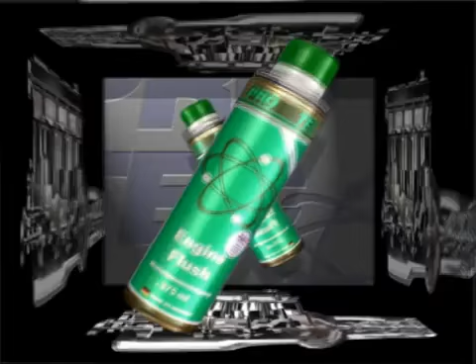Fuel, oil and lubricants, and their effects on combustion engines. Every time an engine is run, deposits are left behind, and these always have a long-term effect on the way the engine functions and its degree of efficiency. In particular, compression is reduced as a result of sediment in the area of the piston rings, oil rings, and their grooves.

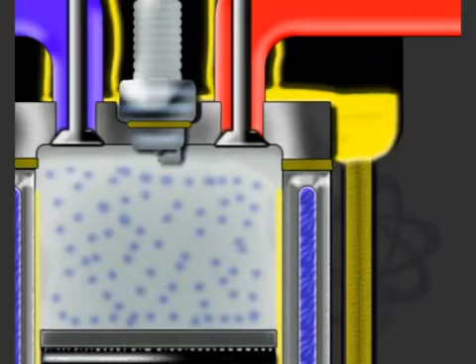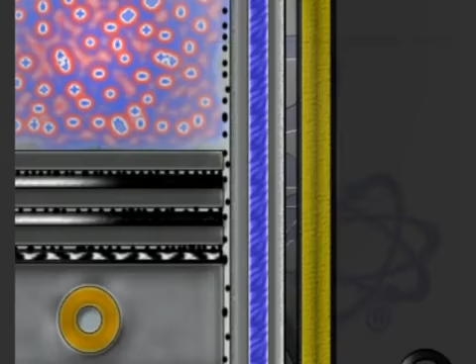The deterioration in the combustion of the fuel-air mixture resulting from this leads to a reduction in the engine's performance. As a result of this, there is an increase in both oil and fuel consumption. This creates a situation where the sediment caused by the combustion process increases markedly, exhaust fume levels rise, and not least, the wear and tear on engine parts escalates.

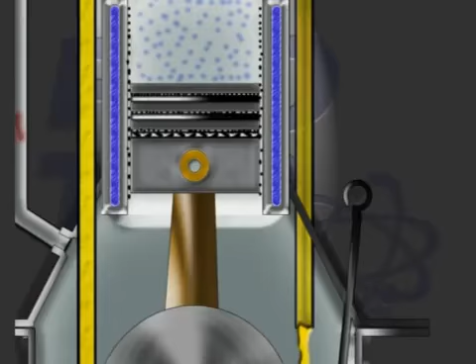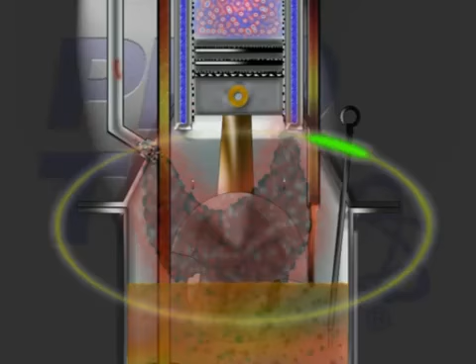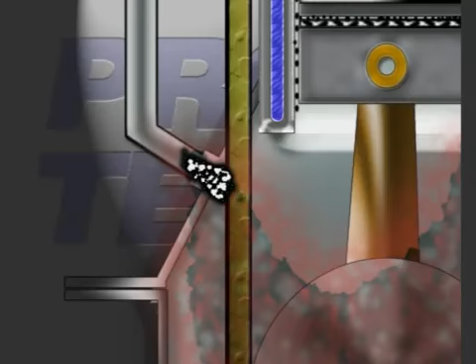Parts of the mixture and combustion gases evaporate in the crankcase and thereby accelerate the speed at which the quality of the oil deteriorates. And this can lead to problems in the crankcase breather system. Larger particles of dirt, such as the formation of resin deposits in the oil ducts, can trigger a reduction in the lubrication of important components, for example, the camshaft.

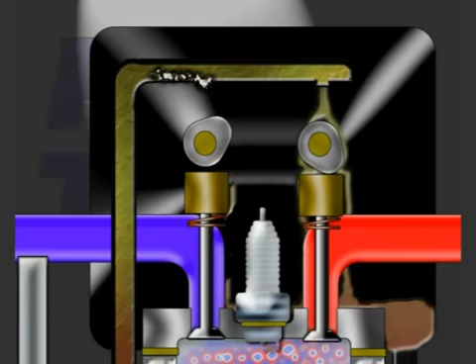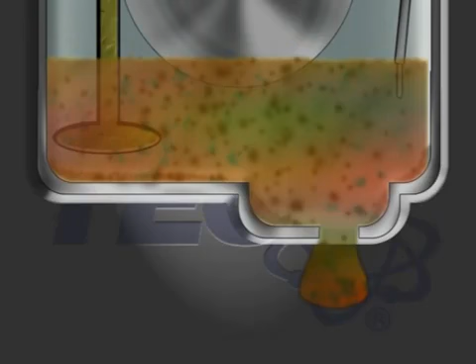Are all these impurities removed by a normal oil change? To illustrate this, let us have another look inside the crankcase. The old oil is drained during the simple oil change process. However, not all the impurities caused by running the engine are removed when the old oil is drained off. Some of them remain in the form of deposits in the oil and the lubrication system.

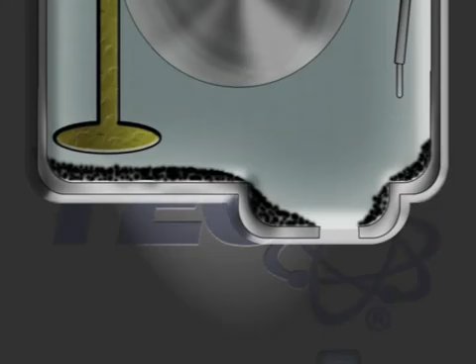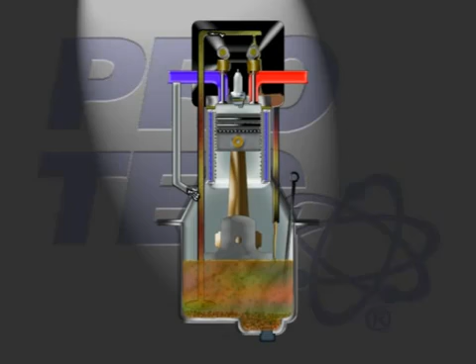Once the engine has been refilled with fresh, clean oil and is then started, the new oil absorbs the remaining deposits, and in a very short time, the oil is once again contaminated. This situation naturally has a negative effect on the efficiency of the new oil. In order to maintain both the performance and the economic efficiency of combustion engines, we recommend that the complete oil and lubrication system is cleaned before each oil change.

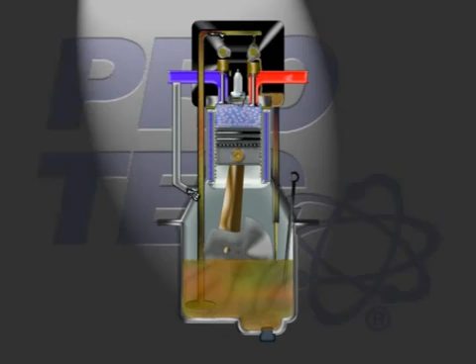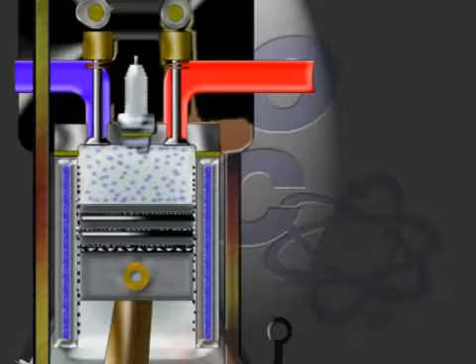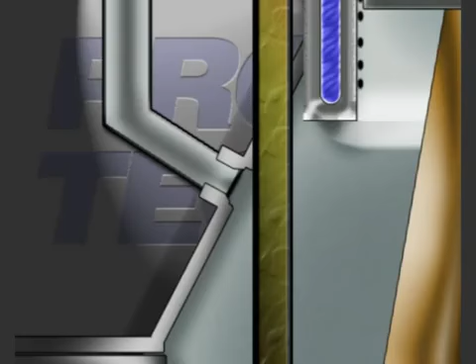After our cleaning agent has been added to the old oil, the engine is run in idling mode for 10 to 15 minutes. During this time, it releases all the impurities caused by running operations in very fine molecules, as shown here at individual problem zones. In our example, this is the piston ring area, the crankcase breather area, the camshaft lubrication area. At the same time, highly efficient lubricating substances protect the engine during the whole cleaning process.

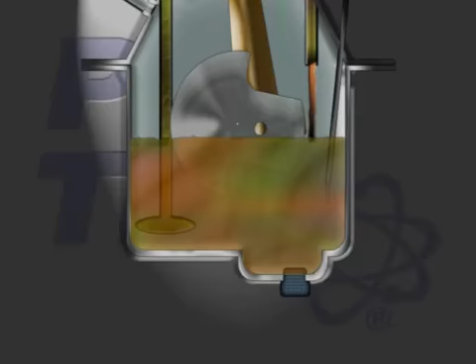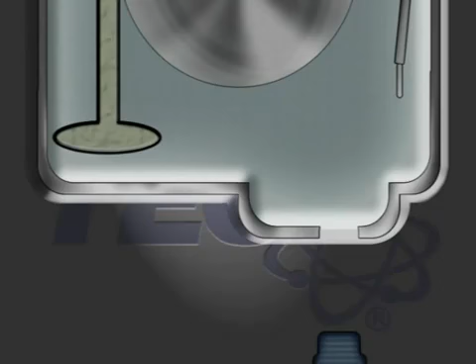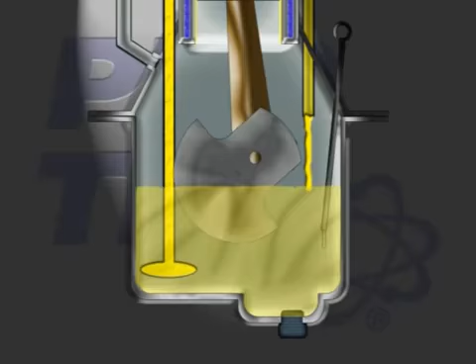Elastomers, such as oil seal rings and O-rings, are kept absolutely supple. All the impurities are now removed when the old oil is drained. This means that the oil and the lubrication system, which we fill with new fresh oil, are kept very clean. Now, the new oil can perform to the best of its ability in a clean environment and fulfill the tasks required of it, such as lubricating, sealing, cooling, purifying, and keeping particles in suspension.

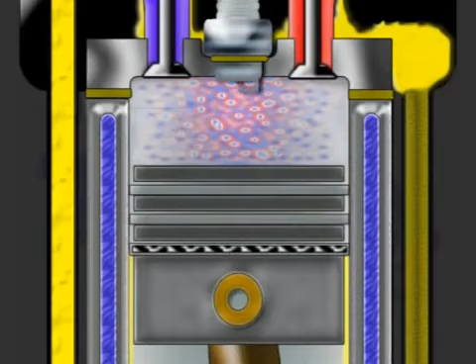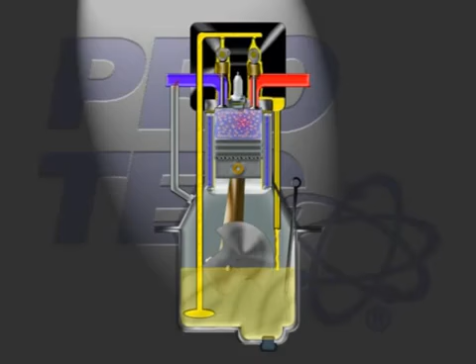The fresh oil is now able to absorb the impurities that have been newly created and is no longer limited in its ability to perform by the old deposits. As a result, we have new, fresh oil in a clean engine, the best possible oil and fuel consumption, improved engine performance, less wear and tear on parts, the lowest exhaust emissions, and a longer life for the catalytic converter.